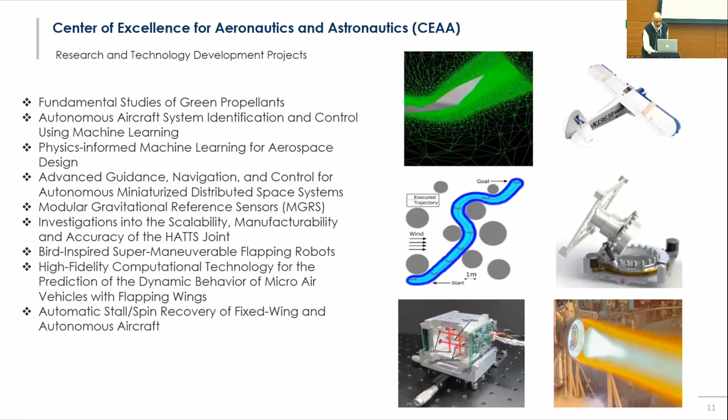Now kind of shifting gears into the second part of the talk, where one of the projects within the Center of Excellence and some of the motivation for this topic is path planning for autonomous systems.

These 4 applications we found to be kind of the spotlight that we've seen in the literature in terms of what people are interested in that could benefit from path planning.

The first example, we've seen a lot of speakers talk about today, is self-driving cars, as well as multiple UAV drones with drone racing.

We have some preliminary results with our partner from Stanford, with Marco's group, where we've done some simulations of assistive free flyers on board the ISS.

An interesting topic that maybe people don't initially realize is that with additive manufacturing, there is path planning involved. So we're looking for ways to expand to multiple applications.

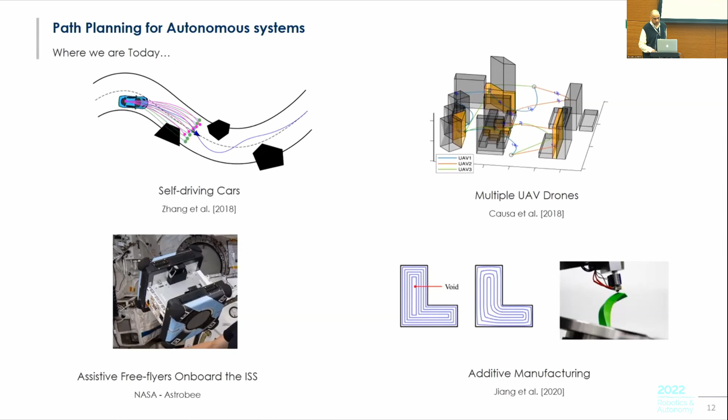Talking more about the motivation here: being able to guarantee safe and efficient operation in the presence of obstacles.

Some of the challenges we've seen, for example with the Astrobee, is that you have a higher order nonlinear system with non-convex constraints, and you want to ensure that there's no collisions with obstacles.

So the approach we've adopted in this research is to have both transverse dynamics as well as what's known as a guaranteed sequential trajectory optimization, referred to as GUSTO.

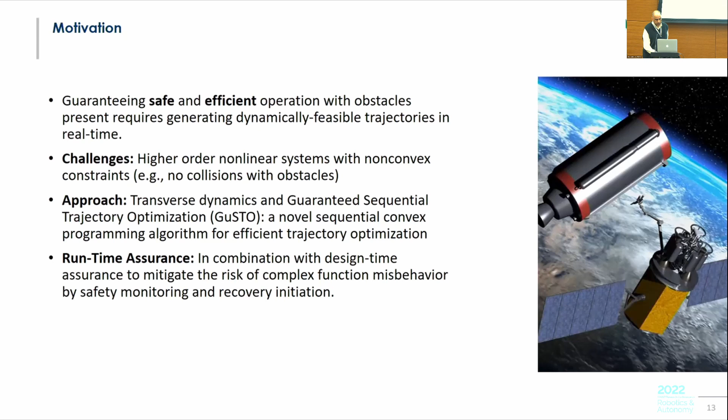In addition, we want to guarantee runtime assurance in combination with our design. This shows an example of a manipulator in space that could benefit from such a planning algorithm.

So just an intuitive kind of approach here to explain how the trajectory planning and control works. We have our plant in addition to the environment and where the plant is.

We want to extract the system states, and we want to feed this back to our control law, in addition to our regulation law, which we're calling here our runtime assurance, and finally the trajectory planning. The trajectory planning is both done in a path generation system.

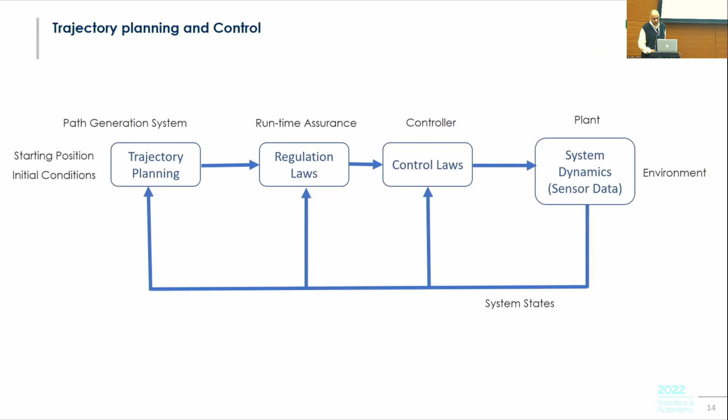Looking inside our runtime assurance module, we want to guarantee safe operation of our trajectory planning. The way the system works, we have two separate trajectories that the system could follow.

So we generate safe trajectory forecasting. From these trajectories, we decide based on our assurance policy whether we want to switch to the not fully trusted advanced trajectory or maintain the safe forecasted trajectory, which is done through the transverse dynamics.

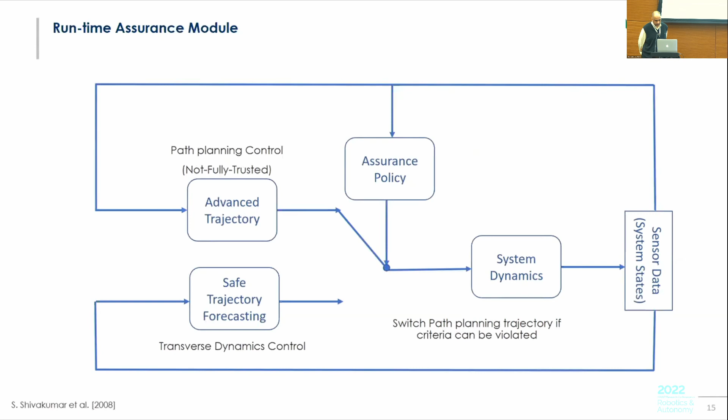Going into how the formulation of the trajectory is done, we first define a cost function. This takes into consideration the final time as well as the obstacle penalty, and we could expand this to include more constraints. Next, we solve for our XR of K, our reference, as well as our nominal control.

This is done in a discrete format. So now once we've done our trajectory generation, we're ready to set the stage for the transverse dynamics.

This is done by parameterizing XR with an arc length S, which then creates our time series. We define it as S of K, such that at the beginning of the trajectory, our S of 1 is 0, and at the final state of the trajectory, we have our S of capital N equal to the total length of the reference trajectory.

XR of S is fitted using spline functions, and our nominal control is defined as such. The mathematical formulation we've created for the transverse coordinates is an example of how this could be built upon a reference trajectory. First we define our system dynamics, a general definition with state variables and control inputs. Then we do a transformation to the transverse coordinates.

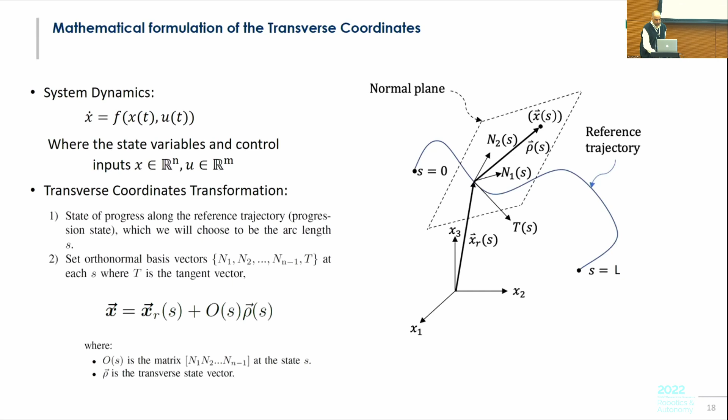Once we've defined our transverse coordinates, we can formulate our transverse dynamics. Once again, this is in the 2D plane of the normal plane shown previously, just looking at the still image of the 2D plane. Here we define our dynamics as the motion along the trajectory.

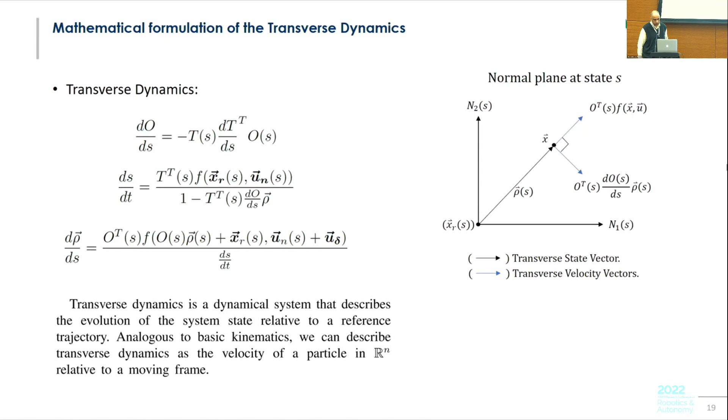This is a good way of understanding what transverse dynamics is: it's a dynamical system that describes the evolution of the system state relative to a reference trajectory, analogous to basic kinematics. We can describe transverse dynamics as the velocity of a particle in Rn relative to a moving frame.

Professor Betchet actually had a good explanation of this in his talk earlier, so I'm not going to spend too much time talking about this here, just going over it again quickly. This was developed in collaboration with Marco Pavone.

This is known as the guaranteed sequential trajectory optimization, which is based off of sequential convex programming. The idea behind SCP is to solve a sequence of convex problems that stem from successive linearizations.

The interesting example I wanted to present here is how the Gusto code could be used for trajectory planning of a quadcopter. The interesting way that Gusto works is that you give it an initial trajectory, here it could be a straight line. Then as you run additional iterations, you can improve the trajectory by linearizing around each new trajectory, starting with a straight line and iterating to improve the trajectory each time.

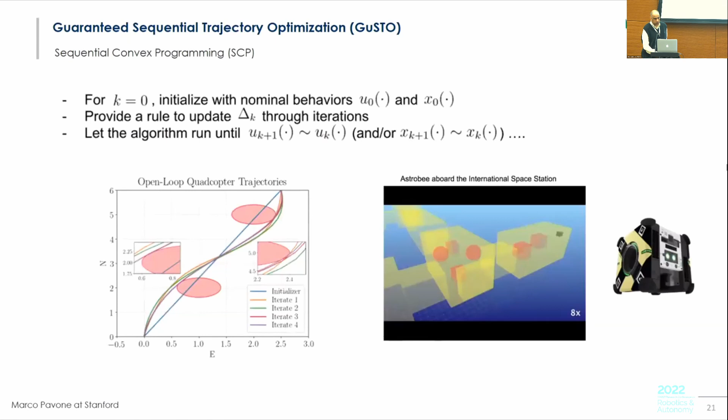This is another simulation we've performed using the Astrobee, and we managed to recreate the environment of the International Space Station. We've worked with Marco's group in the past to test some of these algorithms on board the ISS, so we hope in the future we could actually test these algorithms in space. Although these results are preliminary, we have an illustrative example we wanted to share with everybody today.

This is a simple kinematic system where we have our x dot, a three-state system. Given an initial condition, a reference trajectory, and a nominal control, this example shows how our transverse coordinates are moving along a trajectory.

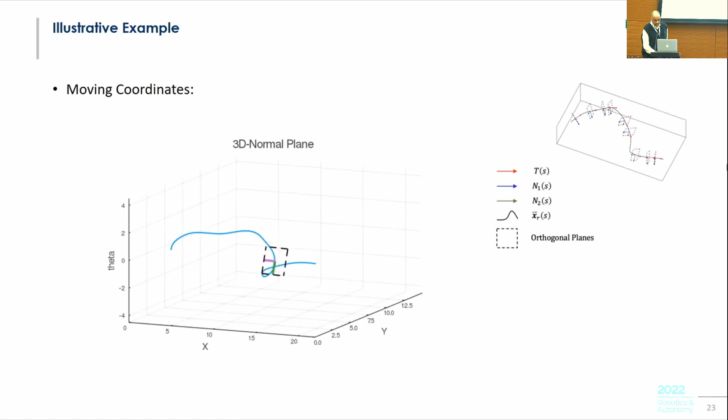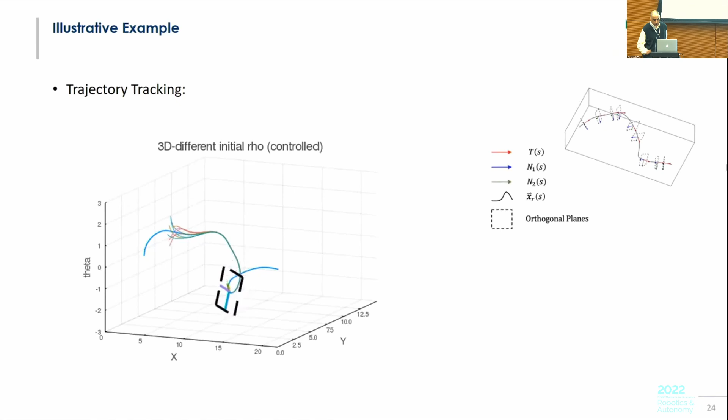We show different initial states and how they all converge to our reference trajectory. On the upper right corner there's a legend showing the different space. These are trajectory tracking examples, and here we show the 2D normal plane in the bottom half. As we can see, initially we start far away from the reference trajectory, and we quickly converge.

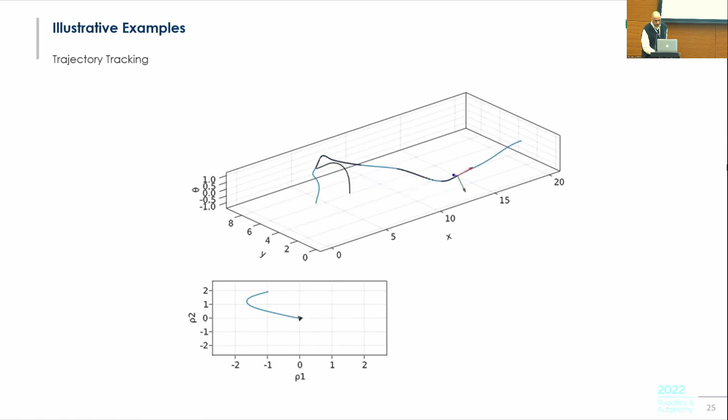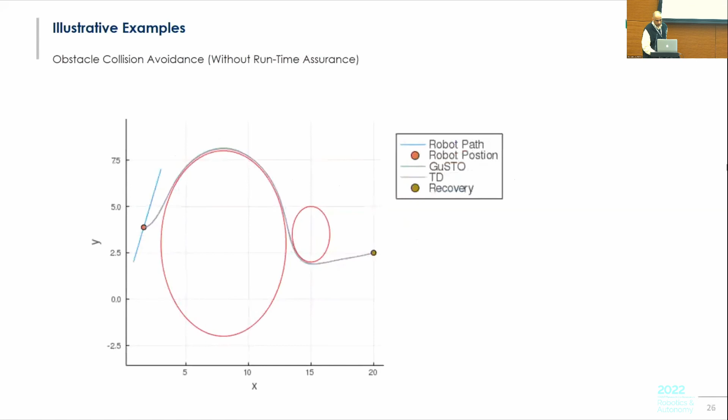I'll run this simulation one more time. As we can see, as the robot follows a random blue path, it's looking for different trajectories in order to avoid the obstacles and reach the endpoint in an optimal manner.